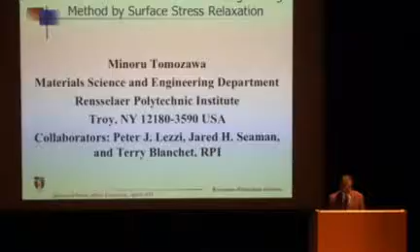At Rensselaer, he trained 46 graduate students, most of them PhDs, and 35 visiting scholars and several postdoctoral associates. He served as the Director of Glass Science and Technology at Rensselaer between 1985 and 1992. He received the Outstanding Professor Award from the School of Engineering of Rensselaer. He is a Fellow of the American Ceramic Society. He's also a former Chair of the Glass and Optical Materials Division of the ACerS.

He received the 1997 Outstanding Educator Award from the Ceramic Educational Council, and he's also winner of the 2010 George Morey Award of the Glass and Optical Materials Division. He has also received the 1983 Science Award and 1991 International Consortium Award, both from the Ceramic Society of Japan. With that introduction, I welcome Professor Tomozawa to the campus, and I invite him to the podium for the lecture.

Scholes Memorial Lecture.

In case you didn't notice it, I still carry the Japanese accent of English after 50 years living in this country. I used to apologize for my accent, but some years ago I went to an international conference in Corsica, the territory of France, on the mechanical properties of materials. The first speaker was a Frenchman, a prominent metallurgist, and these days even a Frenchman has to speak English at an international conference. He said, I'll speak my English with French accent, and I'm proud of it. So following his suit, I will not apologize for my Japanese English.

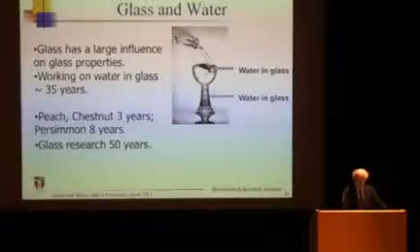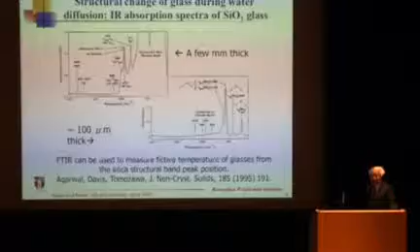The small amount of water in glass has a dramatic influence on various glass properties. If you make a thinner sample, you can look around here, and there are nice peaks. This is the water band, and the rest of the peak is due to the structural band. By looking at both this one and those peaks, we found lots of interesting phenomena.

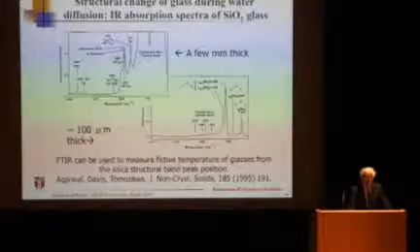This work was done by those two graduate students. Davis happened to be an Alfred undergraduate; he's one of the most careful experimenters, and many of my current research projects are extensions of what he started. Agarwal, as the name implies, is an Indian graduate student, and he is now CEO of a fiber optics manufacturing company with sales of $1 billion. So both of them were the best students I have had, and we got this result.

From very careful measurement of the peak position, we found this peak as well as this peak moves with fictive temperature, and that position can be used to measure the fictive temperature of glasses. That will come sometime later.

Now, water has a dramatic influence on many glass properties, but normal glass contains only about 0.1% water. We wanted to investigate what happens if you put lots of water in glass. This is an area where geologists excel—they use high pressure vessels to incorporate large quantities of water. There are some natural glasses, volcanic made glasses, that contain large quantities of water. So, some 20, 30 years ago, we measured property changes with large quantities of water.

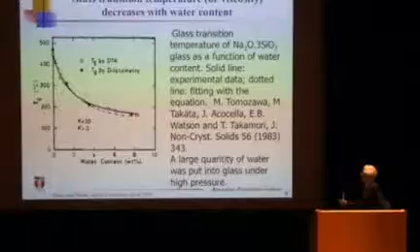This is the sodium silicate glass, with a normal glass transition temperature of 460, 470, that range. If you put water in, it goes down, down, down. And if we extrapolate to 100% water, that would reach the glass transition temperature of the glass form of water. So water can be made into glass too.

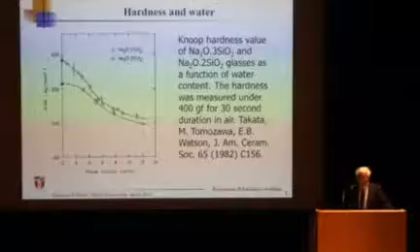This is the hardness of glass. If you have a lot of water, the glass becomes softer and softer. This is a Knoop indentation hardness measurement—both glasses are decreasing in hardness.

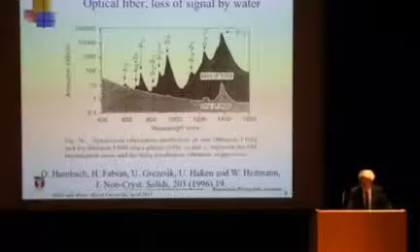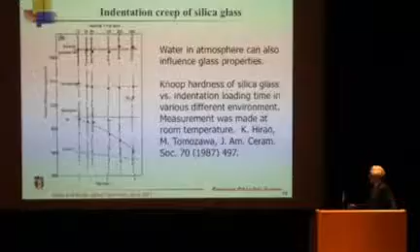Even if the glass doesn't contain water, if you measure properties such as indentation hardness in air or water, hardness goes down. Other non-aqueous solutions show hardness that does not change with time. So only with air or water does it go down, down, down with time.

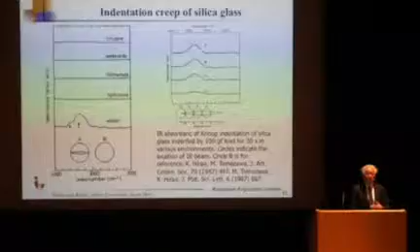This phenomenon is called indentation creep. It's been well known in the community, but what we found is that the drop is due to water entry. Water is entering into the glass while you are doing indentation work. We show this by the infrared peak formation before and after indentation, and if you look more carefully, there's more water here than here. So while you're measuring hardness, at room temperature in air with a slight amount of moisture around, the hardness decreases with time because water is getting into the glass.

From the peak position of infrared, as I mentioned earlier, we found the structural band peak changed with heat treatment time and temperature. In these figures, we held the silica glass at 1100 or 1300 for a long time until it reached metastable equilibrium, then rapidly cooled. So the fictive temperature of the initial glass was 1300 and 1100. Then both glasses were heat treated at 1200 degrees, and the peak approaches the same value. So from this, we suggested that this peak height or position is a measure of fictive temperature - one of the quickest ways to measure it.

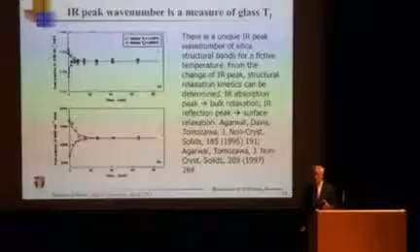As you might know, glass properties depend upon how you heat treat and cool it. Even with the same silica glass, properties could vary widely. So it's important to know what the heat treatment was, what the time and temperature were - but nobody is going to tell you. This way, by measuring the peak position, we can clearly tell what fictive temperature the glass has.

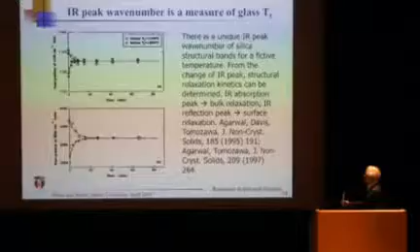The important point is this was done by transmission, so the entire thickness was being measured. This other measurement was done by reflection, measuring only a small thickness of the surface. This suggests to me that the surface layer, probed by reflection, is changing more quickly than the bulk transmission measurement on the same time scale. This fictive temperature change is called glass structural relaxation. So immediately we realized this is telling us the surface structure is changing faster than the bulk.

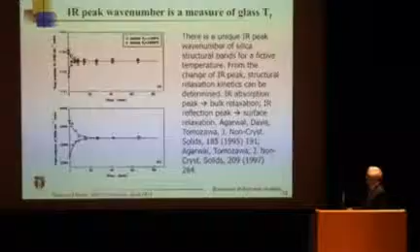This is something new we found - we measured the relaxation time of silica glass as a function of temperature. Bulk relaxation time changes in this manner, but the surface layer changes much faster, with smaller relaxation time. When you make it dry, it's a little bit longer, but still far lower than bulk. If you extrapolate to around 500 degrees, the relaxation time difference is 10 to the 8th power - eight orders of magnitude faster relaxation at the surface when there's moisture around.

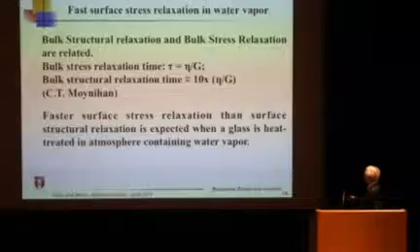So I thought this must be important because glass properties are affected by the surface - chemical durability and mechanical strength are affected by surface. I sensed this was important, but I didn't know exactly why for the past 10 or 15 years. Recently, we revisited this about 10 years ago. By the way, this shows what relaxation time is - the speed of structural relaxation is normally viscosity divided by shear modulus. Stress relaxation, how quickly stress is removed, is also given by this, with a factor of 10 difference.

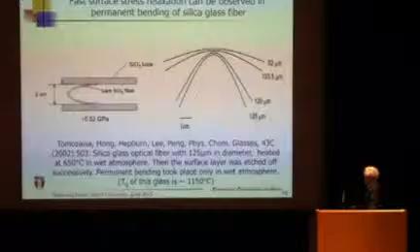What we found is that surface stress relaxation also changes faster than bulk. What we did was take a silica glass fiber, hold it in a silica glass tube, and keep it at 650 degrees for a couple hours - which is 500 degrees below the glass transition temperature. TG is 1150, so nearly 500 degrees below the glass transition temperature. Then we took it out of the tube and found the fiber was permanently bent.

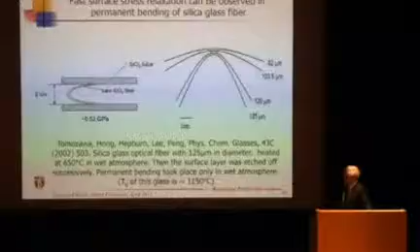This was observed earlier by other people, but most thought this was due to viscous flow of the entire fiber bending. We felt this couldn't be right, so we etched off the surface layer, and then it became straight - showing only the surface was causing this permanent bend. That must be due to surface stress relaxation.

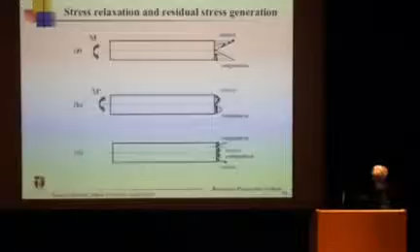One of my postdocs, who had a mechanical engineering PhD, explained it this way: if you have a bending stress, you have tension and compression uniformly changing across the fiber. When you have surface relaxation, surface tension is partly lost, surface compression is partly lost, and when you let go, you end up with a funny stress profile - where the tension was, compression is formed, and where compression was, tension is being formed. This was done more than 10 years ago, and I still didn't realize until a few years ago that this could be important.

I'll show you why it's important.

This kinetics of how quickly the bend occurs depends on how much surface relaxation is happening. We assume that the surface radius of curvature changes as the thickness Z is affected by relaxation. If you have a cross-section of optical fiber, this is half of the cross-section, and the surface layer is relaxing. We want a simple assumption: step function relaxation, exponential relaxation, or if it's diffusion, complementary error function relaxation. We tried many different profiles, since we don't know for sure, but the equation was almost always the same type of expression. The radius of curvature determines how much residual stress and how much depth of relaxation happens.

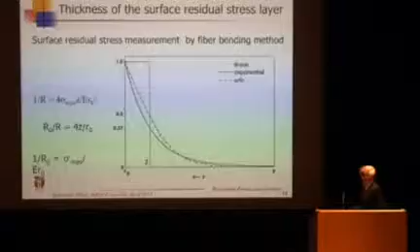We did this as a function of time, square root of time, and the change of curvature. The equation suggests that if it's a diffusion-controlled process, radius of curvature changes with 1 over square root of t. Sure enough, with the experimental error at various different stresses, we saw the bending kinetics following the square root of time, so a diffusion-controlled process is taking place.

If you normalize by dividing by stress, we get superposition of all the data. That suggested to me that the surface layer relaxation is almost instantaneous. From this type of experiment, we got a diffusion constant called the surface stress relaxation diffusion constant. This is an entirely new concept, that the surface is relaxing by a diffusion-controlled process, related to water diffusion. We found that as you increase the water vapor pressure, you get a higher diffusion constant, and you can measure this as low as 300 or 400 degrees centigrade for silica glass.

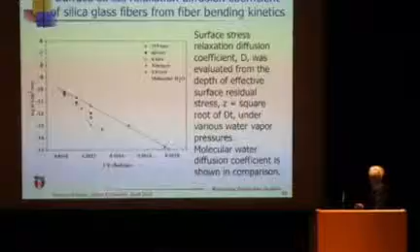This made me think, and this was fairly recent, I realized perhaps this surface stress relaxation may be important in glass science and technology. About 3 years ago I wrote a proposal to the government. This can be used to make glass stronger, that's one idea. I can also explain lots of mysterious phenomena that over the years people obtained no explanation for.

For example, when you do ion exchange, as Corning does for Gorilla Glass, oftentimes the surface compression layer sags a little bit. This was observed by many, and Professor Cooper tried to simulate it, and his conclusion was that it's not possible to simulate the phenomenon.

Essentially it's a mystery. Another mystery is when you take a glass, apply a load, strength decreases with time. It's called fatigue, just like a human being - if you have constant load, the glass gets tired, and after a certain time it breaks. But at a continuously lower stress, there's a limit to how much the glass weakens, called the fatigue limit. That again is not known why.

Now, how can we apply this observation to make glass stronger? You take a fiber and pull it - this applies uniform tensile stress. Of course, if you pull too much, it must break, so you do this under subcritical tensile stress. For optical fiber, maybe you can apply 5 gigapascals.

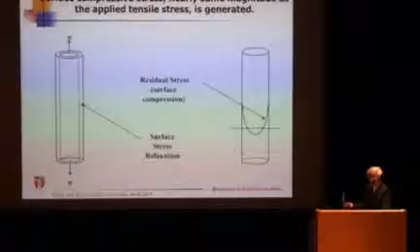In this case, we apply 1 gigapascal or 2 gigapascal in air at 200 degrees, and let go. Then the surface stress relaxation happens, and that translates into compression. This was tension, and after relaxing and letting go, you get compression. That surface compression formation is the practically useful way to make glass stronger. So I thought this can be used to make glass stronger.

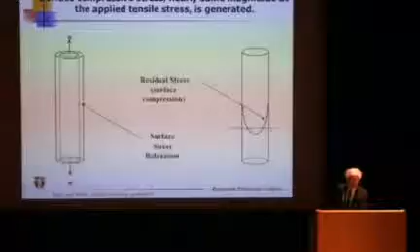Currently there are 2 popular methods to make glass stronger. One is tempering. But before that, I should say, so far I've shown there are some not-so-good effects of water in glass - some are bad, some are good. Good is good, good is better. There's a famous comment: I've been poor and I've been rich, rich is better. The same way, water has a negative effect and a positive effect - positive effect is better. So I'd like to show what positive effect water can have.

As I was saying, there are 2 well-known ways to make glass stronger. One is tempering - you take a glass plate to softening temperature, rapidly cool it, and the glass becomes stronger. That type of strengthened glass is used in your automobile side windows and rear windows. Of course, when you break it, it shatters into pieces because of the high energy stored.

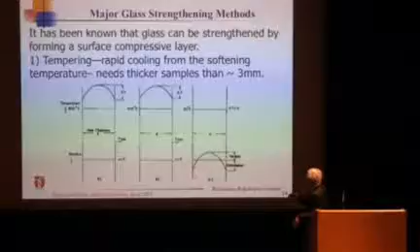To make such high strength glass by tempering, you have to have 3 millimeters or thicker, because what's happening is a temperature gradient when cooling. If you rapidly cool, the center portion stays at a slightly higher temperature than outside, but since it's high temperature, stress is not maintained - there's no stress. As you keep cooling, this temperature profile continues until room temperature, and there's no stress. Then the center has to cool down to the same temperature as outside, and that produces tensile stress.

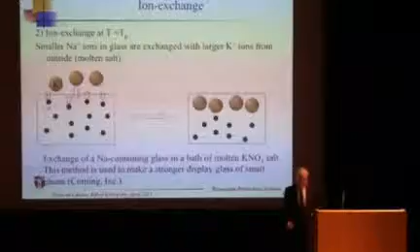So if you have a very thin specimen, you can't strengthen glass plate by tempering. The second method is ion exchange - you take a sodium-containing glass like this, and put it in a potassium nitrate melt. The potassium is larger and replaces the sodium, putting in a high surface compression. That's a very effective way. As I mentioned, Corning's Gorilla Glass is made by this method - that's why your smartphone is reasonably strong.

That second method requires an alkali ion to exchange. The first one needs a thicker sample. The method I'm proposing is not restricted by these requirements. I'm hoping this will be a third viable method.

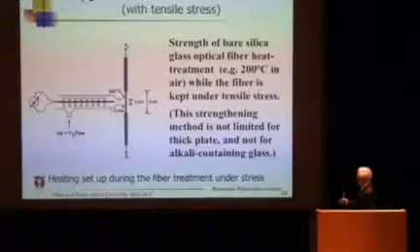We can take a glass fiber as thin as 100 micrometers, 125 micrometers, and just pull it at a reasonable temperature, 500 or 200 degrees. Then we heat it by putting hot air on it, and this becomes the optical fiber.

We remove the plastic coating top and bottom, and only the portion heated remains treated. After holding and cooling down, we let go, take that piece, and test the mechanical strength.

Just to show that a surface compressive stress is generated, we slice the fiber in half. Because of the compressive layer, the fiber should curve in this way, and indeed they do — so we know compressive residual stress is produced.

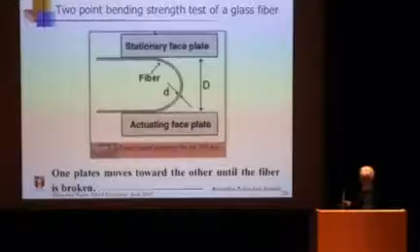Using this treated fiber, we perform a two-point bend test. The fiber is bent and compressed, one side stable, the other side moving. When it breaks, the sound is detected, and we can find the strain at the time of breakage. From this type of measurement, we found the best silica glass optical fiber strength is 5.51.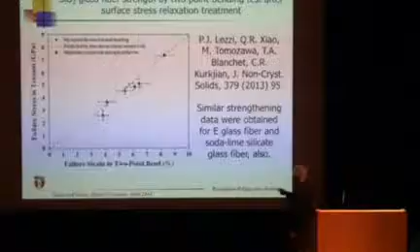This is the this is the normal strength of silica glass fiber, the room temperature optical fiber.

When you heat glass, normally it gets weaker. But when we treat it at 200 degrees under 1 to 3 gigapascals, we got this much higher strength fiber — it's 30% higher by a simple process.

It doesn't take much time in this process. So we definitely demonstrated that glass can be made stronger.

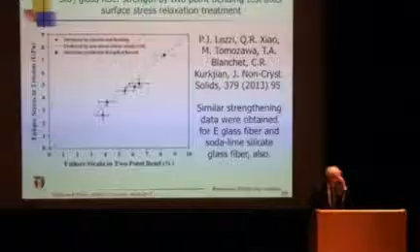By the way, the first author, Peter Lezzi, received the Kreidl Award for this work, given for the best graduate research done last year.

He continued to apply this to E-glass fiber. E-glass fiber is used for fiber-reinforced composite material to make stronger composites. Some high-end composites are trying to replace E-glass fiber with graphite or carbon fibers.

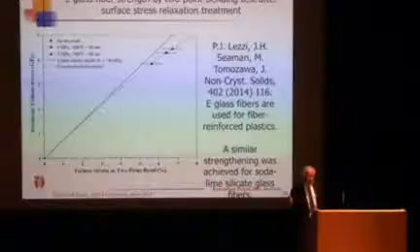I'm hoping this strengthening method can help. This is the original E-glass fiber — after a simple treatment of 1 gigapascal tensile stress at 200 degrees for 60 seconds, we can make it stronger. We've only shown the method; we haven't optimized it. I'm hoping this would eventually reach the strength of carbon fibers, and E-glass fiber is of course much cheaper than carbon fibers. So this is one important finding: surface stress relaxation can make glass stronger.

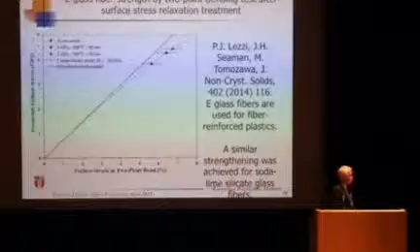The advantage of this method is it's not limited to a minimum thickness — we don't need 3 millimeters — and we can do it without any alkali, because the glass composition is irrelevant. We also did this for soda lime glass. So far we've tested silica glass, E-glass, and soda lime glass fiber — all can be strengthened. I believe all oxide glasses can be made stronger by this method.

Now, this phenomenon we found — faster surface stress relaxation — I realized can also explain a couple of mysteries we've known about for many years. One mystery, as I mentioned, is that if you do ion exchange, you normally get a compressive layer with high surface compression.

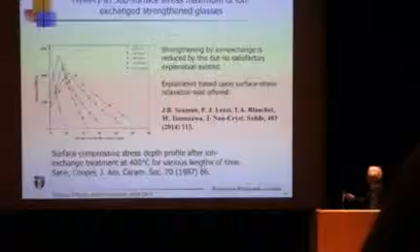With deeper diffusion during ion exchange, oftentimes the surface stress comes down. Ideally it should go up higher and higher, but the surface stress comes down and gets deeper with treatment time at constant temperature. This type of phenomenon has been observed for years, but there was no good explanation.

What we thought is this must be due to surface stress relaxation — in other words, a small amount of water in the nitrate, potassium nitrate, may be causing the surface stress relaxation.

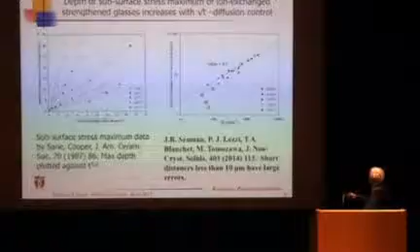So we plotted this data, other people's data, in a square-root-of-time normalized fashion. Except for very short times — which have lots of error because it's less than 10 micrometers — the depth of the peak position follows a square-root-time dependency, suggesting that diffusion is causing this surface relaxation.

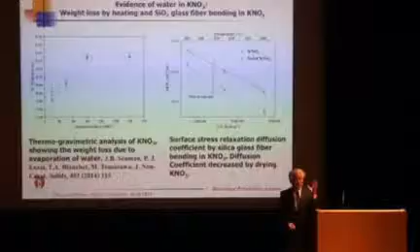We took off-the-shelf pure potassium nitrate and put it in a thermogravimetric analyzer, and weight loss was measured at 200 degrees — something is going away. So the molten salt, once you make it molten, it's very difficult to dehydrate. To get rid of the water is impossible.

So we kept the potassium nitrate in solid powder form and measured the weight loss. And sure enough, weight loss happens. So I believe water is evaporating from this powder.

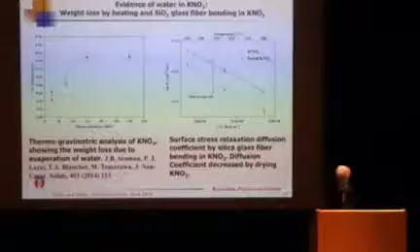Using this before and after the heating, we did the fiber bending test I mentioned. Silica glass fiber was immersed in molten salt and bent, then taken out to see how much bending took place for a given time and temperature. From that we got the surface stress relaxation diffusion constant of silica glass.

So this is before drying and after drying. By drying, it dropped, so certainly whatever it is, we are evaporating it. After evaporation, it's happening much less. So we believe water vapor is escaping, and that produced this relaxation diffusion constant in molten salt.

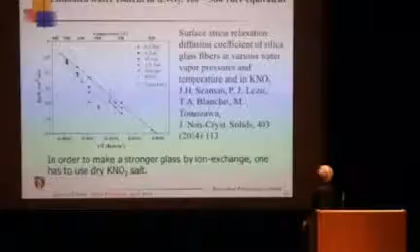This was the original silica glass in air, and this was in molten salt. From this we can estimate the water vapor in the molten salt is 200 to 300 ppm equivalent. Of course it's not in vapor form, but there is a small trace of water.

So if you'd like to make a better ion exchange glass, one way is to dry the potassium nitrate, make it as water-free as possible. Then you can make even better, higher strength glass.

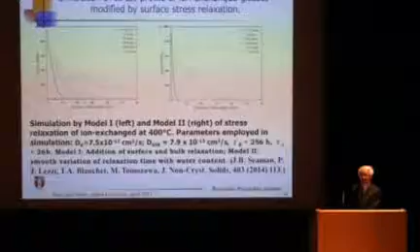Using this idea, we simulated incorporating this surface stress relaxation by diffusion process, and we modeled other people's experiments. Over time we could more or less show the position of the peak shifting inward and coming down. There are two different mathematical models used, and both capture the essential features of the experimental observation. So I believe we solved this mystery of why the surface compression of ion exchange glass goes down.

And this was published this year in the Journal of Non-Crystalline Solids.

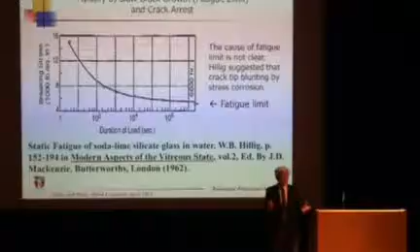The other mystery in this field is fatigue. As I mentioned, if you apply a constant load to glass, it won't break instantaneously, but after a certain time it will break. That's just like a human being, glass getting tired. And this is normally related to the moisture effect, the water effect.

This shows the logarithmic time scale, and this requires great patience to do this experiment. This is soda lime glass tested in water, initially stronger in short time, weaker over roughly one year. So this type of experiment is very valuable, but it's not appropriate as a PhD thesis. One gets very old by the time you finish this research.

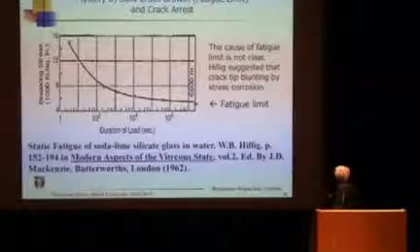So this has been available, and why this happens - even though it's coming down, it starts to saturate, and that's a very good thing, because if you apply this load it will never break. As long as you stay below this load, that product can be used for years to come. That's very important if you're trying to use optical fibers or solar panels meant to be used for 30, 40 years.

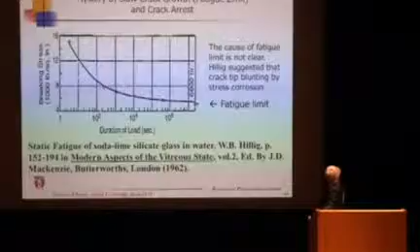Would the glass survive that period? That's a very important question. This observation of a fatigue limit is, in a way, saving many manufacturers. But the question of why this happens is not known, and I believe this is also due to surface stress relaxation.

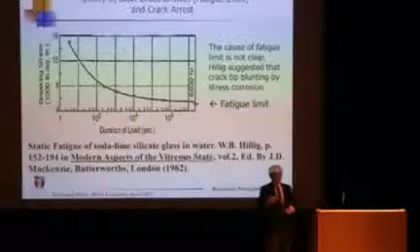Under stress, near the crack tip there's high tensile stress, but moisture around comes in slowly and relaxes that stress. So the tensile stress near the crack tip is reduced, especially over a long time. When the relaxation wins out over the applied tensile stress, no fracture will happen.

So first we thought, oh, this must be surface stress relaxation. By the way, lots of other people suggested different theories, but nobody seems to agree with each other. So we came up with this idea, perhaps we could explain it.

This somewhat related phenomenon to fatigue is slow crack growth. This was pioneered by Sherry Wiederhorn and his collaborators at NIST in the late 60s and 70s. They measured a variety of different glasses and applied stress, or more precisely stress intensity, measuring the crack growth rate as a function of stress intensity.

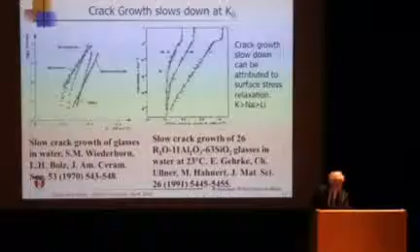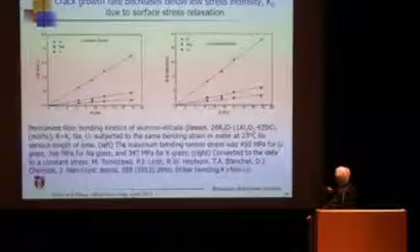So we took those three glasses, potassium, sodium, lithium, and bent them and measured bending kinetics, how quickly we bend. The potassium glass has small radius of curvature, meaning it bends faster. Sodium is next, and lithium was least. They have different modulus values, so we normalized to constant modulus by multiplying by modulus, and the trend is still consistent. That potassium glass has a faster surface stress relaxation, and that glass is the fastest, or shows the fatigue limit under higher stress intensity.

So qualitatively, we think we are on the right track. And this trend can be shown in this manner.

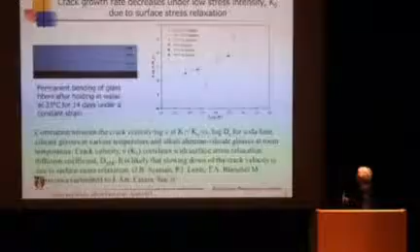This is more bending under constant temperature, constant time in water: potassium glass bent most, sodium next, lithium next. We plotted the evaluated surface stress relaxation diffusion constant - this is the highest diffusion constant - against the stress intensity below which crack growth comes down precipitously, and they seem to correlate.

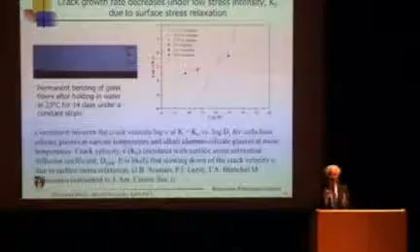This one is the soda lime glass at three different temperatures, the similar parameter shows this. But of course, they are comparing different features - this is the glass type, this was temperature effect, so we don't expect them on the same line, but the trend is always the same: higher surface stress relaxation diffusion constant means higher stress intensity for crack growth stoppage. So this qualitatively supports the guess that the fatigue limit is caused by surface stress relaxation.

So we did this more quantitatively, and the reason we can do that is I'm collaborating with mechanical engineers. This related work was done by Michalske, who also happened to be our Alfred graduate way back. He was an expert on mechanical properties, and he did an interesting thing.

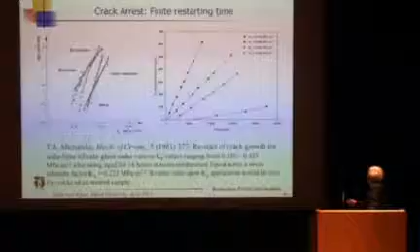He took glass, soda lime glass, and kept it around here. It's coming down quickly - very slow crack growth. Crack growth is negligible around here. So he took this glass and held it around here for a certain time.

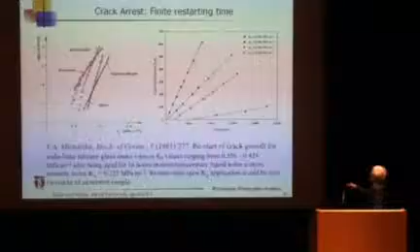16 hours at this point, around this point, and then brought it to higher stress intensity. He found the funny thing that if you go to here, you have to wait a long time before the crack restarts. If you go to a higher value, it starts more quickly. So by the treatment here, this wait time was observed.

That's again a mysterious phenomenon nobody can explain. But we think that while holding the glass here, it experiences surface stress relaxation. You are applying small tensile stress. At the crack tip, there is high stress, and water vapor is slowly affecting that stress profile, and when you let go, it produces compressive stress.

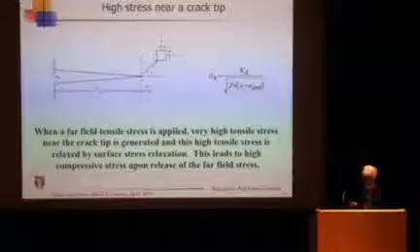So this, in collaboration with a mechanical engineer, is the normal expression. When you apply uniform stress, there's high stress on the crack tip, and that looks like this - very high stress, this is infinity, and this is the crack tip. This is extremely high stress unless there's plastic deformation.

Now, if you hold at a lower K value, this crack will not grow, or grow very little. And then there's a moisture effect - that stress is relaxing, with time going this way. This is diffusion controlled, so it would be propagating as square root of time.

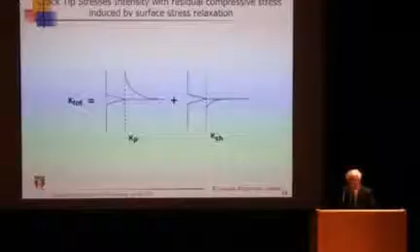And that would produce the force, and that part would suddenly affect the crack propagation. We can analyze that part in this manner: there is original tensile stress, but relaxation reduces this, and we can superimpose that as a compressive stress. The relaxation produces effectively compressive stress.

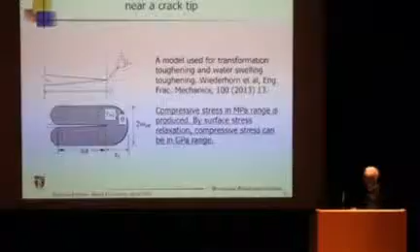So we have to deal with this far stress field and the local stress due to compression, and that has an effect on shielding the crack growth. That idea has been used in other materials, such as transformation toughening of ceramics. More recently, Wiederhorn thought water diffusion itself is making an expanded swelling region that mitigates the applied tensile stress, so we use a similar mathematical formula.

Normally, in general, stress intensity is a function of applied local stress and a weight function. This is the mechanical engineer's realm, so I have to accept what they say. The weight function is given as long as you have a particular shape of the crack tip. Then we have the compression due to the diffusion-controlled process - this is a complementary error function, a diffusion controlled process.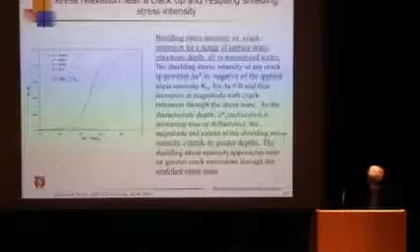So when you apply tension to the crack, there's high positive stress intensity, but at this point, there's an equally large opposite side - there's not much stress here. So when the crack propagates here, it will take a long time at this point because the stress is very low. In other words, this is the shielding effect.

So the velocity of the crack, we assume that the original crack growth line stays linear, ideal case, if there is no shielding. But we have to introduce shielding, and therefore it will take time to propagate in this region where there's shielding stress intensity. So crack growth is very small.

By the way, this is such a small scale, 10 to the minus 10, that's 1 angstrom scale. So this 10 angstrom, it's a very short distance. Crack growth is very difficult, slowly growing, but it takes time.

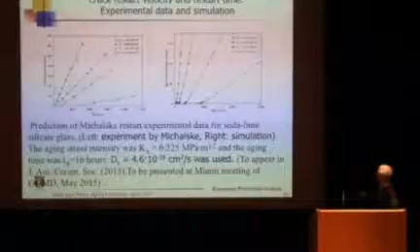So we can calculate how long it takes to go through, and we came up with this result: if you apply lower stress, you have to wait a long time to pass through this shielding region. With low stress versus high stress, it can go up very quickly. After passing the shielding region, normal crack growth starts.

So that's exactly what has been observed by Michalske, and some years later, German scientists as well as Wilhelm reproduced this result. So this is our simulation, and they are matching reasonably well.

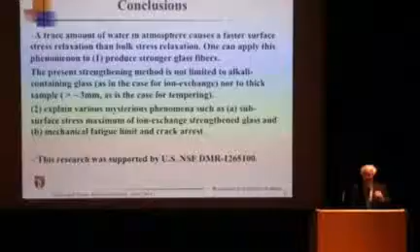So we feel we have solved the second mystery of the glass strength in terms of surface stress relaxation. In conclusion, the trace amount of water in atmosphere causes a faster surface stress relaxation than bulk stress relaxation. The surface stress relaxation concept has not been recognized or discussed, so I don't think you'll find it in Web of Science.

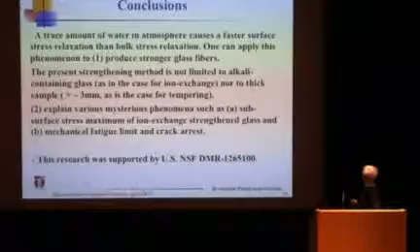And we found this can apply to make stronger glasses, and that method is applicable to all kinds of glasses, not limited by thickness. Finite thickness is not needed, unlike in tempering, or we don't need ions for ion exchange. Any oxide glass can be strengthened by this method.

Even if you have a large bar, as long as you have enough machine to pull, you can make the glass stronger. At the same time, this method, faster surface stress relaxation, can explain various mysteries known in the glass science community.

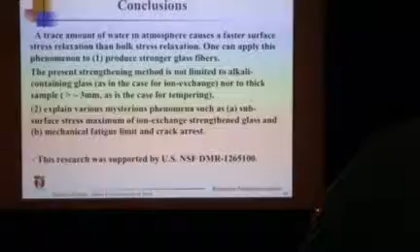One of them is the sub-surface maximum, the surface compressive stress made by ion exchange sliding, and that can be explained by surface stress relaxation. The second one is the fatigue limit, which can be accounted for by using the idea of surface stress relaxation.

And that is, at least, the fruits we have obtained. Whether it's sweet or sour, we shall see. So that's my conclusion, and I appreciate your attention.

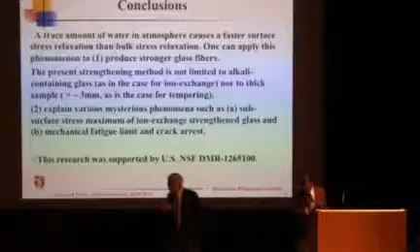That, as I was saying at the end, all depends on how strong a machine you have. Even if you have a 5 millimeter rod, as long as you can pull the bar below the maximum breaking strength, you can go as high as the glass bears, or even bending also. That much applied stress approximately adds up as compressive stress. So in principle, we haven't demonstrated a large bar, but in my opinion, even in sheet Willow glass or Corning, maybe put two-dimensionally, make it longer. So I think all the limitation is your imagination.

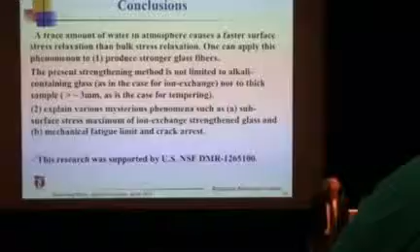Yeah, this one is after applying to NSF, funded nearly 2 years ago. So 2 years was enough to demonstrate our ideas and applicability to solve the mystery. That part is a very interesting question. How do you apply it? At the moment, we haven't done anything beyond 100 micrometers fiber.

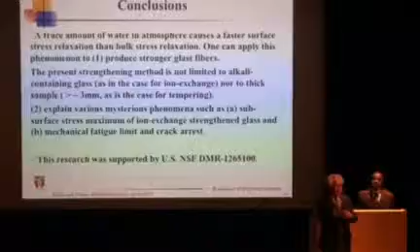But one of my colleagues, after I gave this talk internally, worked on composite material, e-glass fibers and carbon fiber. The price of carbon fiber is far, far greater than e-glass fiber. So if you could make e-glass fiber close to carbon fiber strength, that would be great. He has a machine to do this, so I'd like to try and see what happens.

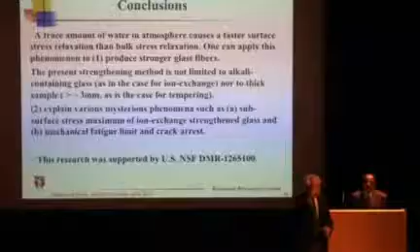We have not reached the ultimate. We just did preliminary tests, but demonstrated the feasibility. For example, if you have 5 gigapascal strength fiber, you add 2 gigapascal by pulling, that's 7 gigapascal. Then you can apply 6 gigapascal or even higher value, where incrementally you can increase. And in my mind, there's no limit.

Only limit is when you have surface compression, there must be surface, interior tension. So it will continue until such time the interior tensile stress becomes the bond strength, at least in principle. So that's, I feel very optimistic until proven wrong.